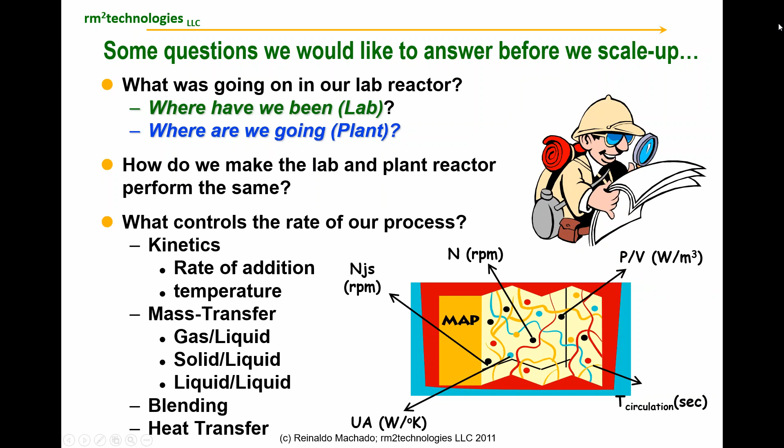The agitation intensity and the agitation equipment design can impact many of those fundamental processes. So, for example, blending and macro mixing, which involves just the overall pumping rate of the impeller, just tells us how well we're moving material through the reactor. We could have mass transfer issues where we have a power per unit volume, especially in multi-phase processes where we have gas and liquid. We also would require impeller pumping flow rate as well. So we need to break up the bubbles and move them around.

We could have heat transfer. Typically that involves the impeller velocity and how well we're moving material past the heat transfer surfaces. We can have very fast reactions where local gradients of concentration can be impacted by how quickly and how effectively we move material. Impeller pumping flow rates, power per unit volume. Fast reactions become much more complicated because of the local reactions that can occur near a feed tube.

We can have phase dispersion issues with solid-liquid, gas-liquid, which would involve power per unit volume, the kinetic energy of the materials involved, and the shear rates. And scale up is really about balancing these different process rates as they change with process size. The problem is that things change differently. So as you scale materials up, all of these variables are changing in different directions. And so it's best to find out which is the critical variable that is controlling your process and use that critical variable as your scale up.

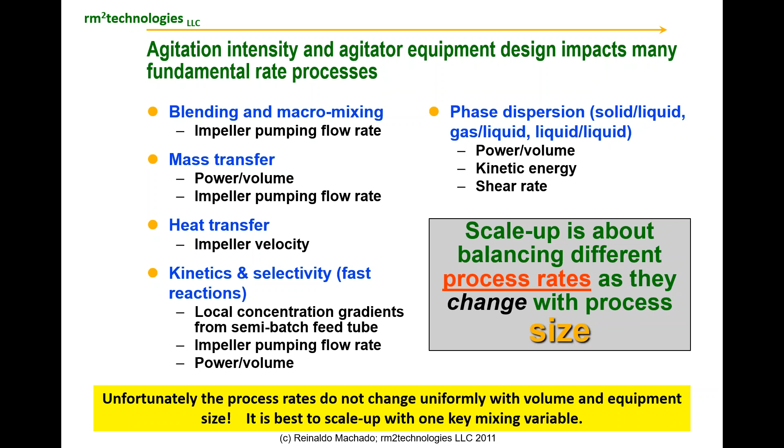Now, it's important to understand a little bit about the mixing process. For just a simple mixing process where we have a low viscosity material operating in turbulent flow, we can usually describe three different zones of mixing. At the very smallest scale, we have micro mixing. This is at the level of turbulence. This is where the turbulent eddies are involved, and they involve the viscosity, the density, and the power per unit volume in that local region. And that's important for the final reactions or as materials diffuse together. This is especially critical when you have very fast reactions or things like neutralizations, or perhaps nucleations for the formation of crystals.

Mesomixing is a slightly different region. That's where we have mixing at the scale of the feed tube and the impeller, where we're adding materials. The materials are swept through a wide region, but then eventually dissipate into the reactor as they become incorporated in the flow or as they react away. This involves where we put the feed tube, the rate that we add materials, the power per unit volume, and the impeller pumping rates.

And finally, we have macro mixing. This is the larger scale mixing phenomenon that occurs as materials are being pumped around and they're diluting the feeds as we add them to the reactor. And this is a function primarily of the feed rate and the impeller pumping rate. And so we'll use these sorts of concepts as we go forward.

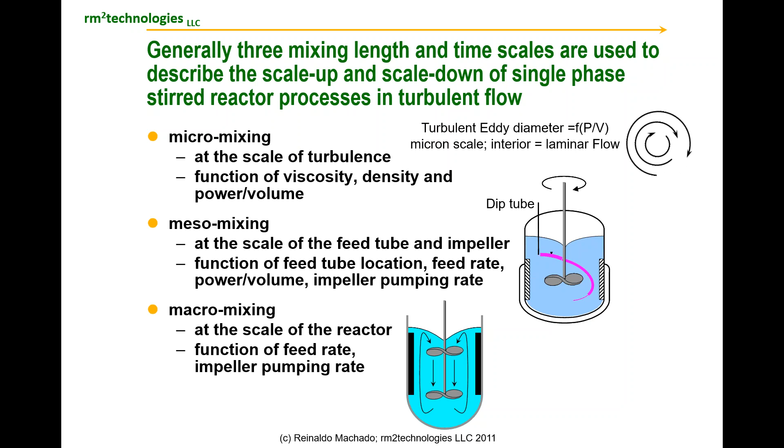So the first one is the overall blending and macro mixing. Typically we have a lab reactor and we're trying to identify just how quickly, how effectively are we actually blending or moving materials. Now, early in my experience, I had to work with a lot of very hazardous materials. And so in the lab reactor, it was not really possible to do some simple fundamental measurements. So I came up with a very simple technique, and the way this technique worked was like this.

We would take the exact material that was in our reactor. In that reactor, we could have a polymer reaction, and we could have viscous materials. We had a heater at the top of the reactor, and we would turn the heater on for a specific amount of time with the agitator off. Then we would turn the agitator on and the heater off, and you would see the temperature in the vessel become more uniform over time. At the beginning, you would have a high temperature at the top and a low temperature at the bottom, and this was your largest differential in the stratification of the reactor. And as the impeller agitated, the materials became more and more uniform.

So here's an example of what the delta T between the top and the bottom looks like as a function of time. So here were the conditions of my reactor. It was 10 centimeters, and T represents the diameter of the tank. It was a marine impeller with a diameter of 6.9 centimeters. The fluid was approximately 1,000 centipoise and a density greater than 1. This was, I think, glycerol as an example.

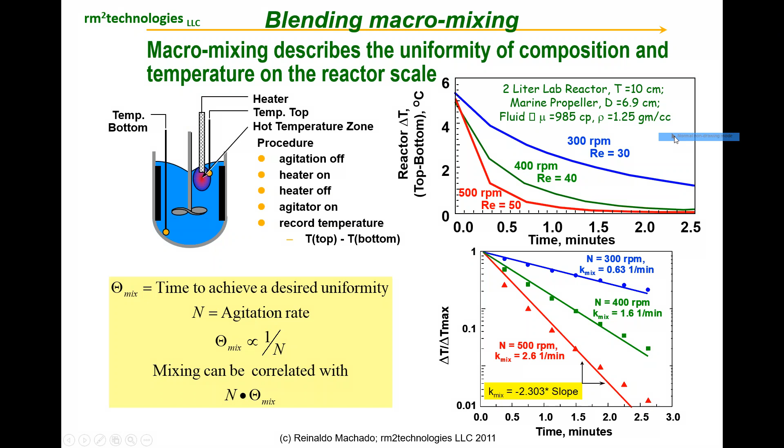And so these kinds of correlations can then be developed. And there's a list of those that you can find in the literature, or you can develop your own correlation for your lab reactor. In this example, we took a look at the VisiMix correlations, and here we have our uniformity from the previous experiment. Here's the actual trace from VisiMix, and over here, we did a comparison at 300, 400, and 500 RPMs.

This is basically a laminar flow situation. And for the lab reactor, we received 90% uniformity in 220 seconds, and VisiMix predicted 146. At 400, we had 86 and 92, and at 500, 53 and 64. And in the world of mixing, this is considered very, very good agreement because in the mixing world, we're not looking for numbers that have three significant figures. You're typically looking for general order of magnitude within a factor of say 50%.

So this represents a very efficient way to get your mixing numbers, which was actually to use VisiMix. So once we established this ability with VisiMix, we no longer did all these experiments in the laboratory. We found that that wasn't as necessary once we had VisiMix. So that really helped us as we continued our process development.

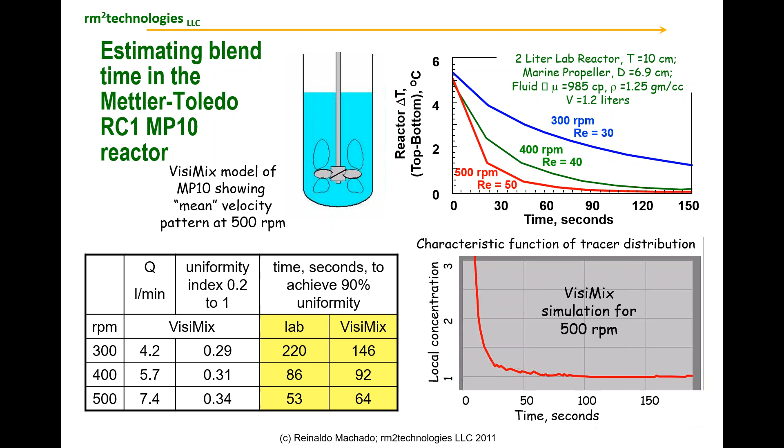VisiMix, which was 1 over the circulation time, gave us a slightly faster time constant, and that's really related to the difference between VisiMix using sort of a compositional approach, and we used a thermal approach. But overall, this is, I would consider, pretty good agreement.

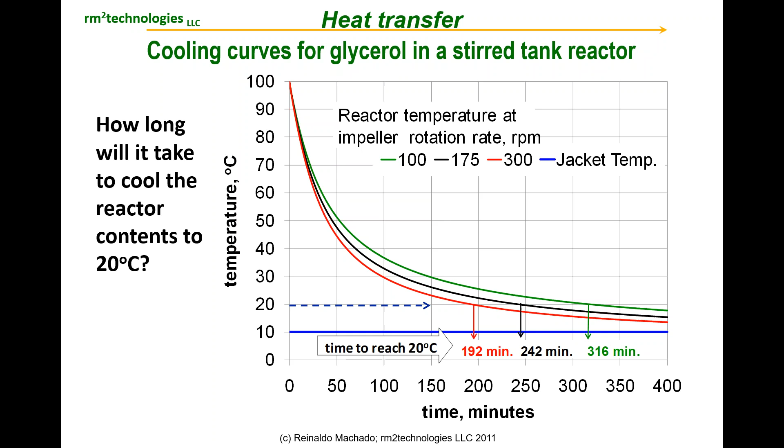So here's an example of a question we might ask, which is how long does it take to cool the reactor contents of glycerol, starting at 100 degrees C, and we want to get it down to 20 degrees C. And we can see that at different rotation rates with the constant jacket temperature of 10 degrees C, if we're operating at 300 RPM, it's 192 minutes, and if we're operating at 100 RPM, it's 316 minutes. So the question then is, how do we characterize heat transfer in vessels? What's the best way to approach this problem?

If we look at the heat transfer coefficients that we can get from the reactors, we can see that in the case of glycerin, it's quite complex, because as the reactor cools down, the viscosity of the material increases quite substantially. So we start off here at 100 degrees and we're at very low viscosities, and then as we cool it down, the viscosity increases, and so the heat transfer coefficients decrease correspondingly.

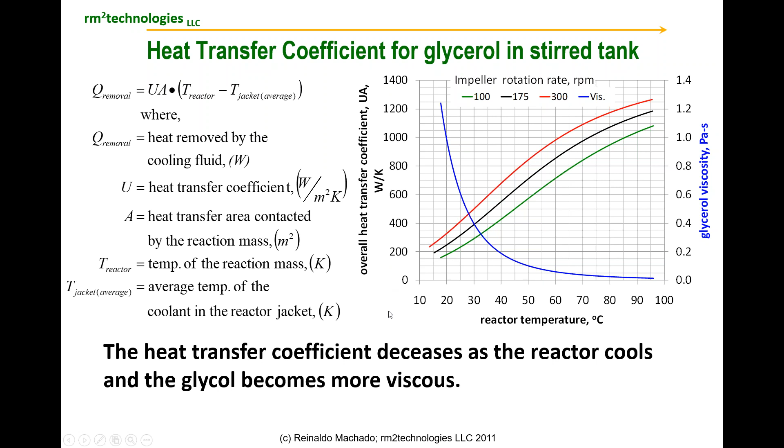So here the blue curve shows our glycerin viscosity as a function of temperature, and over here we see our heat transfer coefficients in red, black and green corresponding to the different rotation rates. And so as the temperature goes down, the local heat transfer coefficients also decline. So how do we characterize systems like this? And how do we make sure that we can scale this type of a problem?

Can someone respond? Is everyone seeing my little arrow here? I think you can see the arrow that I'm using, or let me just try this here. The spotlight, yeah, there we go.

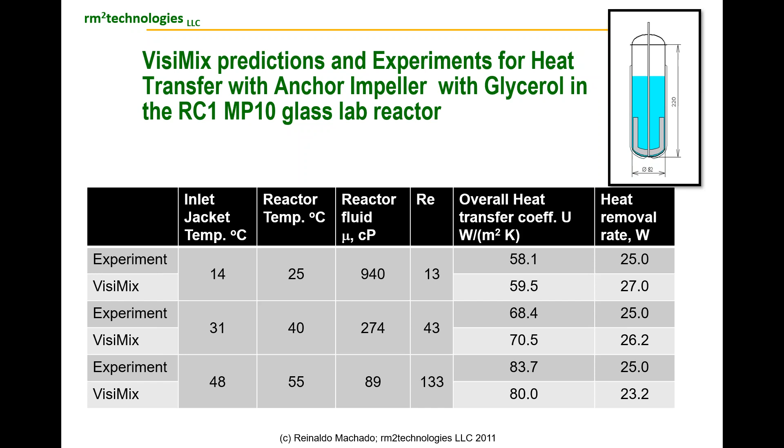Another important issue is understanding agitation and mechanical power input to the reactor to make sure that we can best describe the power per unit volume that goes in. This is very important for doing work for fast reactions, and knowing really what the capabilities of our mixer are in terms of the power input and making sure we don't burn out motors and the like.

Now, it's fortunate that in the world of mixing, a single curve can be used to describe the power performance of a given agitator. So here we see in this purple curve, the fluid foil agitator follows the following curve for all different scales, if we plot the power number versus the Reynolds number.

Now, the power number is given as the actual power that was used in the process, divided by the density times the rotation rate to the third power and the diameter of the impeller to the fifth power. So this number is established for different impellers and different geometries. We plot that on this left-hand axis. On the x-axis, we plot the Reynolds number, which is the rotation rate of the impeller times the diameter of the impeller squared over the viscosity. And this is a fundamental measurement in hydraulics that most chemical engineers are very familiar with.

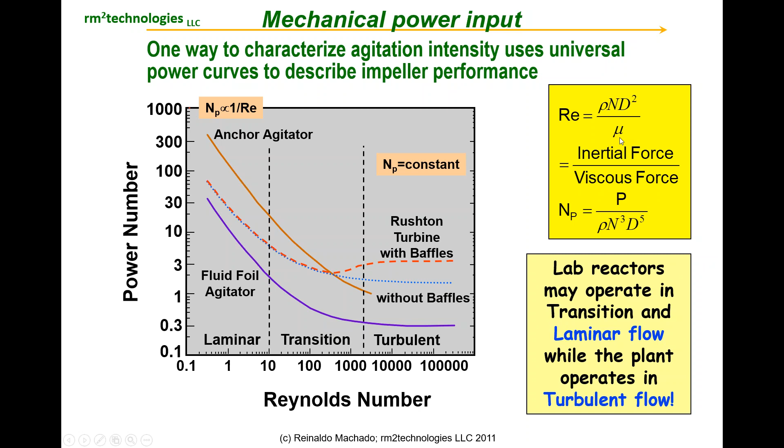So doing this first calculation, as you can see, the most important variable to understand where you're at is really your viscosity. So getting viscosity measurements is very important. Of course, if you're using low viscosity materials, it's not a problem, but when you start doing polymerizations or materials that are more viscous, then you really need to understand the influence of viscosity.

We had characterization for a Mettler-Toledo AP01-0.5 reactor, a small reactor. The volume of it is, I think, about 500 cc's. And we wanted to understand a little bit more about its power performance, and so we actually did measurements on this reactor. This is a nice system because it really covers a variety of regimes. This simple paddle design and impellers allows you to operate one reactor from low to high viscosities all in one system.

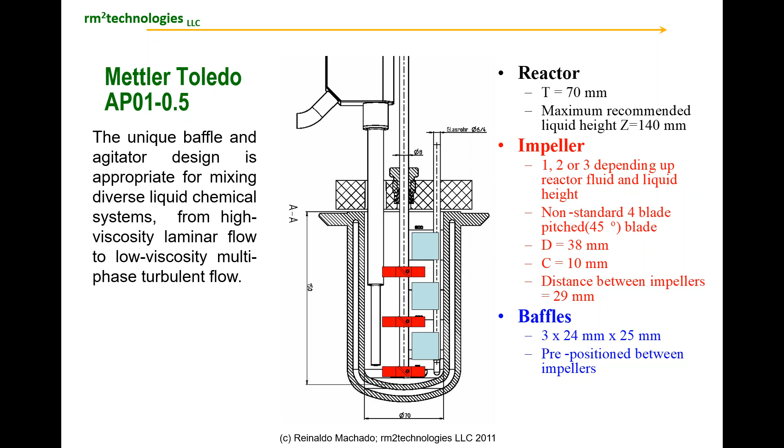So we actually did the measurements. We measured the power using torque meters, and we plotted this for different impellers. In this particular case, the red curve represents 3 impellers having a slightly higher power. We can see here we have the inverse to the Reynolds number in this regime by plotting the power number versus the Reynolds number, and we become constant over in this regime. When we have 2 impellers, we go to the blue curve, and 1 impeller is the green curve.

And we use this very simple model, which really derives from well-known literature correlations, and we developed this little correlation for that reactor for understanding the power. So now if we run a reaction and we know the viscosity, we can understand what the power put into that reaction was.

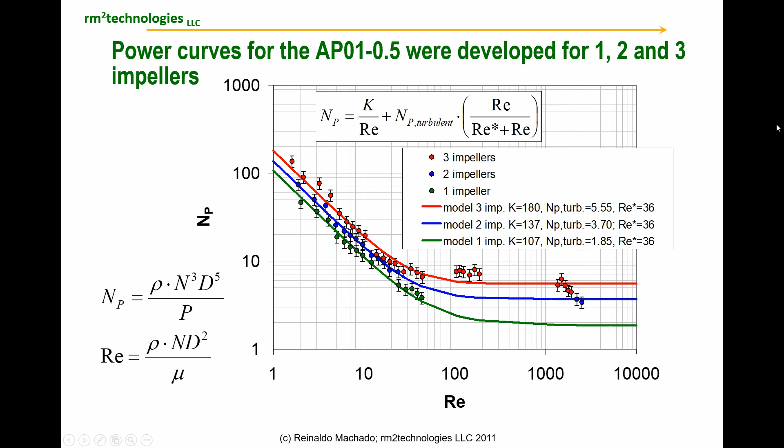We also did macro mixing correlations based on thermal uniformity for this AP01 reactor, and we also developed a model for that. And so here we have the T95, which is the time to achieve 95% uniformity, times the rotation rate, which gives us a dimensionless number because this is rotation per time and this is time. So basically you can think of this as actually the number of rotations. And this here is the Reynolds number.

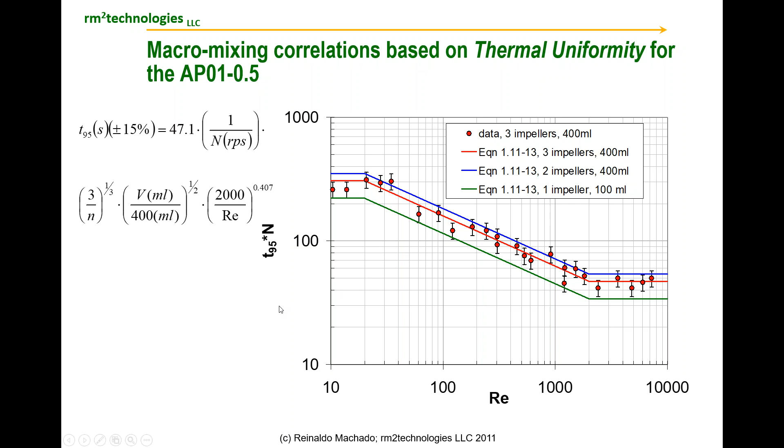And this follows a very traditional type of curve that you would see in large scale industrial reactors. It follows a similar trend even in the lab reactors as well. And so here we have the different equations for those different situations based upon this correlation. So I wanted to compare this with what we see with VisiMix. So let's take a look here at a couple of things.

So this is excellent agreement in power numbers, and it's certainly a lot easier to do a 5-second estimation in VisiMix versus a 5-hour experiment that you have to set up. So we are very satisfied with this level of correlation, and really because of that, we didn't need to do any more laboratory experiments to get power numbers.

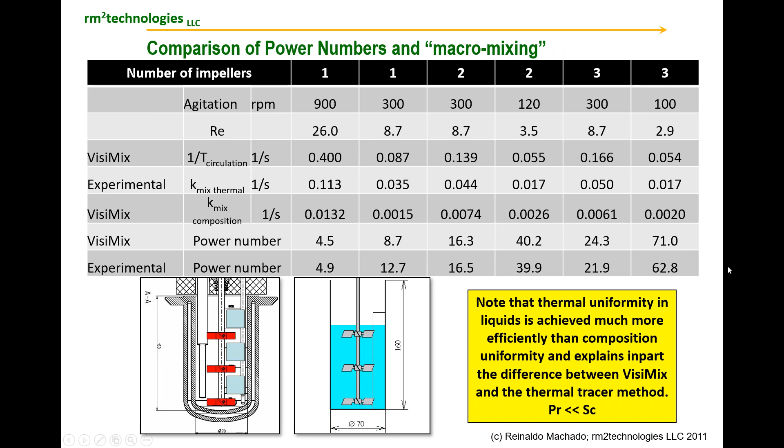Another very important variable in scale-up is gas-liquid mass transfer. In my former work with Air Products, we basically provided support for hydrogenation to many customers, as we sold hydrogen or oxygen to them for various reactions.

And all these experiments, by the way, I want to just give a little explanation here. I have a separate company at the request of Air Products at the time because they didn't want me to be teaching this class at conferences and whatnot under Air Products, so they asked me to sort of separate myself when I taught the course. And all the materials that I teach are all general purpose information. There's nothing that's secret to any companies. This is all just sort of generic stuff. And all these measurements were actually made in my home laboratory where I had a mixing lab. So I didn't use my corporate resources for this. This was done on my own, really for educational purposes. And originally I taught this course at Lehigh University. So that's a little bit of the background as to why I teach this separately. It was really at the request of the company, and they were very fine with this. And in fact, I teach the course internally, and I have taught it to people at Air Products at the time.

Okay, anyway, that being said, understanding mass transfer is very important. So what's typically done in laboratory reactors is we use a hollow shaft impeller that basically recirculates gas. It draws gas in through the top here. Let me show you with this marker.

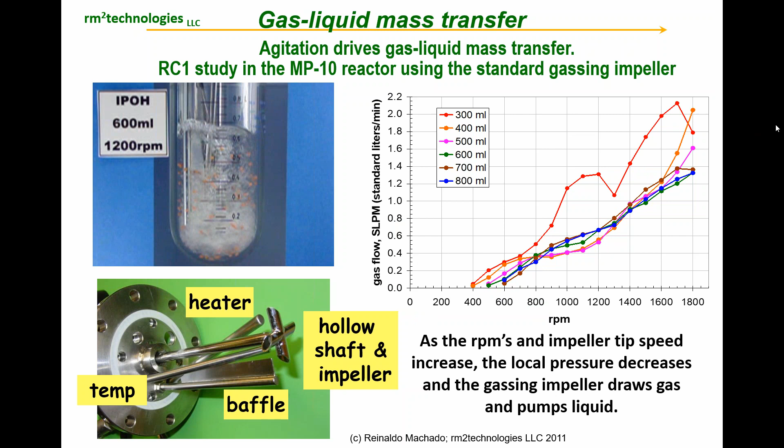So here's a particular experiment that you would do to measure mass transfer. So we now know from the previous work here the gas flow rates. Now we're going to measure the mass transfer coefficient. So in this particular example, we start with a very low rotation rate at 200 RPMs, and then we quickly ramp it up to 1,000 RPMs.

Now, if we have a closed vessel and we have pressure in the vessel, let's see what happens. So we see that at time 0, we begin this ramp up here in the RPMs, and all of a sudden we see a decline here in the pressure in the reactor. And that's because as this occurs, we're getting absorption of gas into the liquid. Basically, gas is dissolving.

And as the gas dissolves, the pressure goes down, and we can use this decline in pressure to estimate the overall mass transfer coefficient, or how efficiently at a given RPM rate we can absorb gas into the liquid. So as we're doing, say, hydrogenation, we need to constantly replenish the gas in the liquid phase because it gets consumed by the chemical reaction. And we don't want to starve our catalyst of hydrogen, or of oxygen in the case of an oxidation. And so you want to maintain a very high level of replenishment or high mass transfer rate.

We can think of this as a first order process of gas from the gas phase going to the liquid phase, and we can think of the mass transfer coefficient basically as a kind of a rate constant in our process here. And that will be given as the KLA. That's the rate constant. Now that's a function of our agitation intensity and the gas flow rate, as we saw earlier. And then the driving force is the saturation concentration at the interface minus what's in the actual bulk phase. And that's really our overall driving force. So this is the rate constant associated with that process.

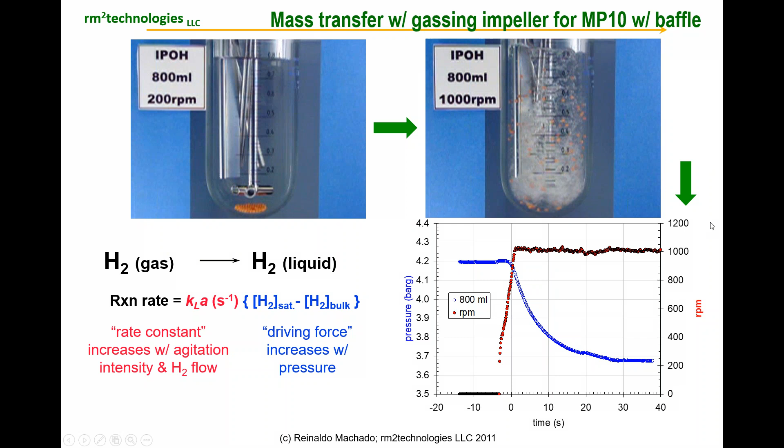A little bit of manipulation generates the following equation. If we plot the natural log of the pressure minus the final pressure over the maximum initial pressure from the charge of gas into the headspace minus the final pressure, and we compare that to this constant here versus time, and we plot this on a log scale, you'll see that all of a sudden this pressure follows a linear profile of log versus time, and that allows us to measure from that slope the overall mass transfer coefficient.

So this is an important way of determining the capability of our lab reactor to replenish gas, and we'll see how that helps us in the future for getting information on scale up. So we can adjust our lab reactor, for example, to match various types of mass transfer coefficients that we might need in our scale up. Here I have the mass transfer coefficient that we got from all these experiments compared to the RPM, and this is at different liquid levels.

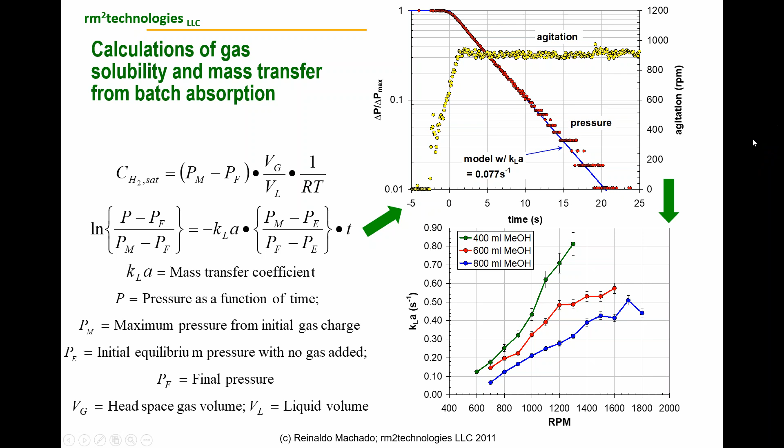So let's take a look at comparing this to what we predict in VisiMix. Okay, so over here we have all the particular details of the experiment. This was done at 140 C for this particular experiment. It was about 1 liter of material, a surface tension of 26 dynes, viscosity 0.25 centipoise, the density about 930 grams per liter. So this was the real experimental material that we were using.

We had the standard gassing impeller. This is for the HP60 high pressure reactor, and the diameter of the vessel was 10 centimeters.

From our previous correlations of our gas flow rate, we knew that we had the following superficial velocities. Superficial velocity, I think you might be well versed in this, is basically the volume of the gas flow rate divided by the overall surface area of the vessel. So you take the cross-sectional area of the vessel and you divide that into the overall gas flow rate to give you the superficial velocities.

So here we have at different RPMs the increasing superficial velocities. We have agitator power that we actually measured, and we have the actual mass transfer coefficients that we measured in the laboratory experiment. For the VisiMix, we didn't have exactly this gassing impeller, so we chose to look at it under two conditions. One was to match the power, and the other one was to actually use the blade width itself of 10 millimeters. So we chose two different approaches, matching the power and then matching the actual geometry of the vessel itself, okay?

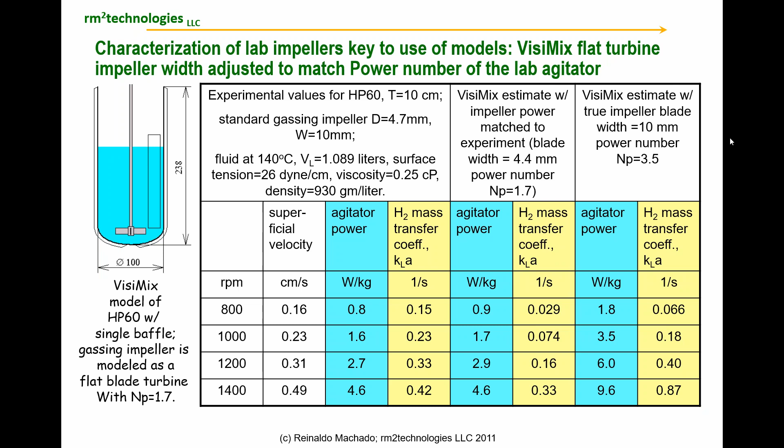So here's some summary of what we see there. We see basically the measurement of our vortex. We measured 2.5 centimeters. VisiMix gives us 2.1. And if you use the actual impeller width here, which is a little bit wider, you get 3.6. Our mass transfer coefficient measured was 0.42, and here we have 0.33 and 0.87. And this also gives us our gas holdup, our Sauter mean diameter, circulation rates, etc. So we get a lot more information which we can use for our scale up.

But sometimes in the VisiMix we have to bracket things. Not everything is a perfect single number. Sometimes we have to approach the problem from a couple of different angles to help guide the regions that we're in. And that's an important rule of scale up. There isn't necessarily a single number that gives us the answer. Sometimes we have to bracket our problem, and this is an example of how we can bracket the problem and look at it. And so you can see that certainly we're going to be somewhere in between these.

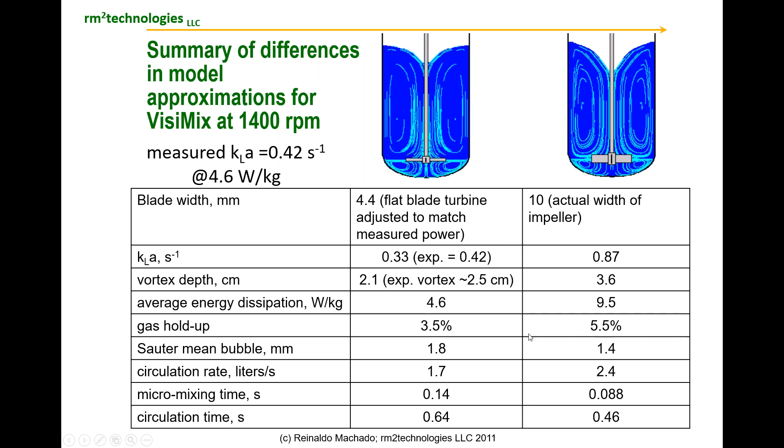Scaling up mass transfer coefficients can be quite a challenge, and let me describe how this was done. So how do we scale up all this? We have the mass transfer coefficient. Here's a slightly different approach. What we're going to do is adjust the pressure in the lab reactor to achieve the same results as the plant reactor. So this is actually a scale down activity, to see how we can measure mass transfer coefficients in a very large vessel without doing these experiments in the vessel. The plant and lab raw materials and catalysts are from the same lots. This is very, very important, that we have materials from the same exact lots for our experiments.

Mixing in the lab reactor was measured to be very high. So we're going to run our lab reactor at very high mass transfer coefficients. This mass transfer coefficient is so fast compared to the reaction that our lab bulk concentration is essentially equal to the saturation. So having measured our mass transfer coefficients, we know how to get this to occur. Then the lab reactor pressure is adjusted to match the plant rate profile.

So there was a plant reaction that was done, and in that plant reactor we measured the pressure, the uptake of hydrogen in the reactor, and we know, of course, the temperature in the reactor. We then programmed our lab reactor to exactly match the temperature profiles of the plant, and then we did something very interesting. We adjusted the lab reactor to give an equivalent volumetric rate as the plant. So when the plant was at 800 pounds of pressure, we found that we could get the same result in the lab when we ran it at 700 pounds. So sometimes this is what we have to do.

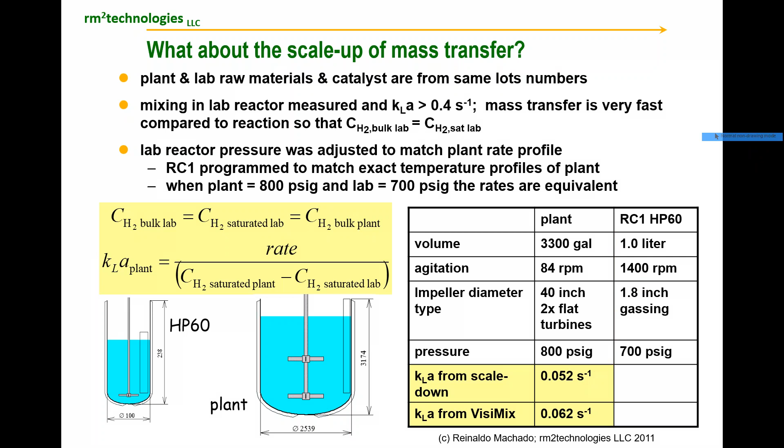For liquid suspension, I'm going to move a little quicker now to get past the liquid suspension, but we also did things by putting conductivity probes at the bottom of our lab reactor. We measure basically the conductivity as we increase the rotation rate, and we measure that here, and then we observe at the bottom when we see suspension off the bottom. So using a conductivity method, we can get this information of when materials are off the bottom.

Generally, for solid or chemical reactions, we just want to keep things off of the bottom of our vessel. It's not necessarily important that everything is uniform in a chemical reaction unless we're drawing material off. But if we're not doing that, it's most important to get it off the bottom. That's really what we worry about, especially for things like Grignard reactions or materials that are very heavy, adding zinc, for example, as a reagent to our vessels, things like that. Zinc powders, copper powders, things that might be difficult to remove or move from the bottom.

The NJS is the rotation of just suspension. The correlation for just suspension follows the Zwietering correlation, which involves the fraction of solids in the material, the gravitational constant, the difference between the density of the material you're suspending and the density of the liquid, the density of the liquid itself, the size of the particle, the kinematic viscosity in the liquid, and a constant associated with that vessel. So this must be determined empirically for the lab reactors and for the plant reactors.

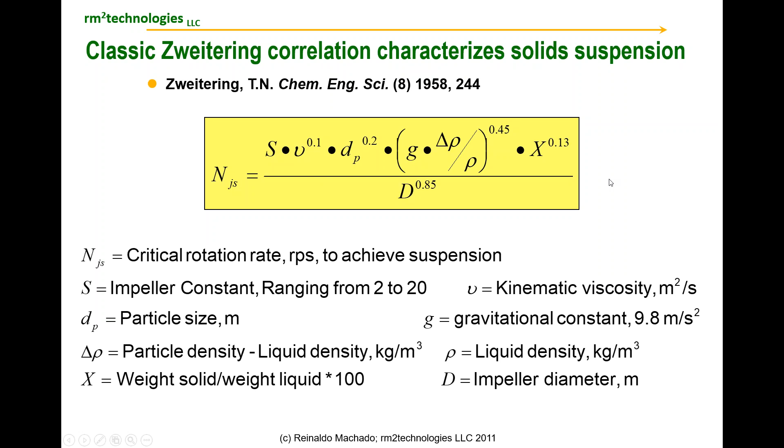I did find that it was a little bit more difficult to get the solid suspension to match the VisiMix if you didn't get the geometry exactly correct. If we assume the composition and the physical properties are the same in the lab and the plant, our scale-up follows a very simple scale-up correlation, where the just suspension rotation rate of the plant compared to that of the lab is given as the ratio of the constant for the plant versus the constant for the lab. These are empirical constants that are determined for each vessel, multiplied by the ratio of the diameters of the impellers. That's assuming that there's a similar type of impeller.

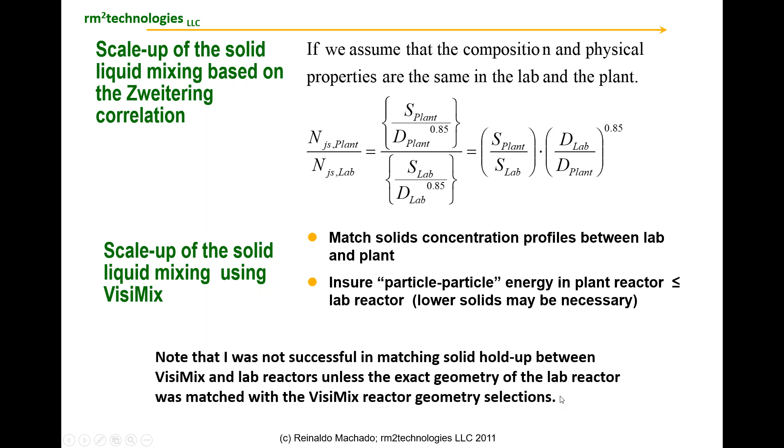So in the scale up using VisiMix, we have to match the solids concentration profiles between the lab and the plant, especially at the bottom of the reactor. And we need to ensure that the particle-particle energy in the plant reactor is less than the lab reactor. So sometimes in the scale up in the plant, we might have to have lower solids. That's very important. And I wanted to note that I was not as successful in matching the solid holdup between the VisiMix and lab unless the exact geometries in the lab reactor were matched with the VisiMix reactor geometries. When I got the exact geometries without any kind of modification, then I got a much better correlation.

Mixing regimes: we visualize micro-mixing as occurring in a very small local area. Meso-mixing is the swept-out region, and macro-mixing is really occurring in the overall volume. I think many of you have seen this type of process when you do a pH titration, for example.

Early on in the pH titration, what we see is a very rapid reaction at the beginning in a very local region. And as the titration continues, eventually you see a color change distributed over a larger volume. So actually, in a titration, we go through all these different mixing regimes, not simultaneously, but in sequence, starting off small and then winding up over a wider range. So many of you have actually seen this in real life when you've done titrations.

For different types of reactions and different types of mixing regimes, we have different sorts of rules. If we start with the simplest, macro mixing, the dependency of a process on macro mixing is really about the feed rate. If we have macro mixing control, the only thing that we can control is the feed rate, and we want to keep this constant, which is the rotation rate times the diameter cubed divided by the feed rate.

What that basically gives us is a kind of dilution process, where the feed coming into the reactor is divided into the rotation rate times d cubed. This is the pumping rate of the impeller. So this is a relationship between the pumping rate of the impeller and the feed rate, and that's a dimensionless quantity. And that really is what controls when you have macro mixing control.

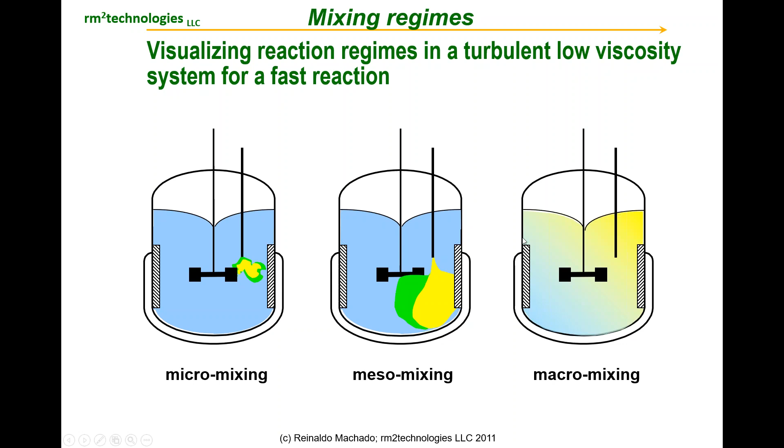When you have micro mixing control up here, the feed tube location is very important. You know why? The feed tube location determines what the local intensity is. If you're far away, it's a bigger zone. If it's closer, it's a smaller zone. And that really depends upon the viscosity of the solution and the feed tube location. The rule of thumb there is power per unit volume, because power per unit volume really determines the local area of turbulence where the feed tube is located. Macro mixing is occurring over a much larger range.

A more difficult region to control is the meso-mixing regime here, which depends on feed tube location, your feed rate, and the number of feed points. The rule of thumb guideline there is quite a bit more complex, which involves n to the fourth d cubed over the feed rate and the number of feed locations. In the short course, we go over a lot more details, but you can see it depends on a lot more variables.

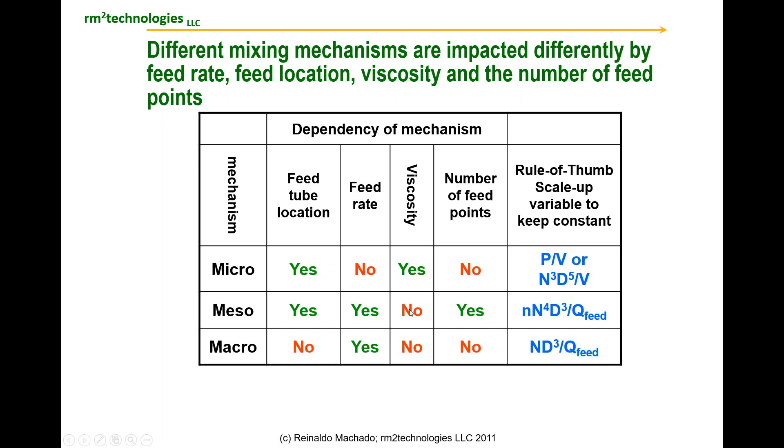I'm going to show you an interesting example here, which I compared to VisiMix, and let me describe this because this is a very fun and interesting experiment that I did. Let me get my spotlight here. Into these reactors, I have a solution of thiosulfate. And the thiosulfate solution will then neutralize the iodine. It's an oxidation reduction reaction.

So iodine is yellow, the reaction with starch is black, and the reaction of thiosulfate with the iodine starch complex then also turns clear. So the different colors give an indication of what's going on in the reactor. So in VisiMix, I wanted to do a prediction of the maximum difference of the thiosulfate solution during this

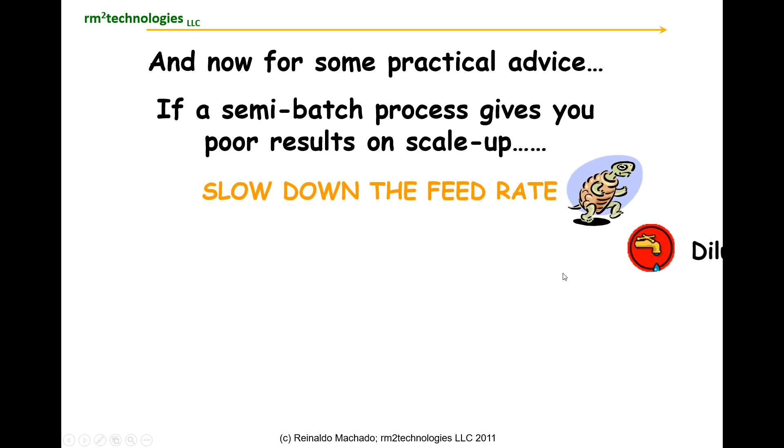Some very simple practical advice for those of you who have to go do scale-up tomorrow morning in your plant reactors: if you get bad results in your semi-batch process, you can always slow down your feed rates so that your feed rates become adjusted according to your mixing capabilities. You can dilute your feed concentrations, which then dilute at the feed point to keep you in a regime where you don't have high concentration gradients.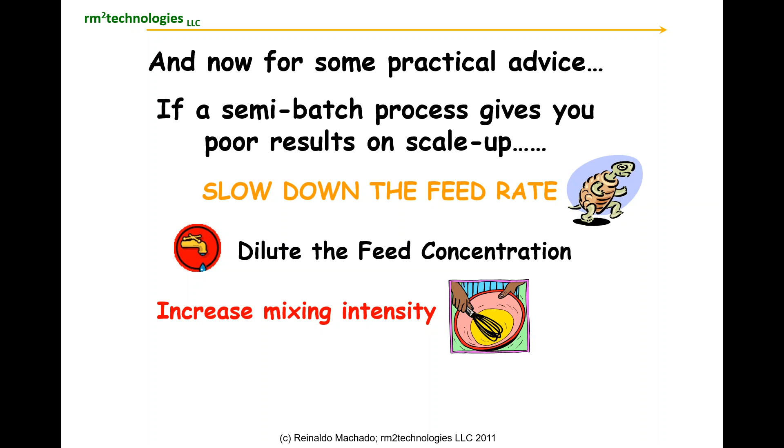You should increase your mixing intensity so that basically your dilution rates are a lot faster. And of course, you can always lower the temperature a bit so your kinetics slow down so you don't wind up with reactions that are occurring too quickly. So these are some of the things that you can do, but of course, lowering temperature also increases viscosity, so you have to be a little bit careful with all these different things.